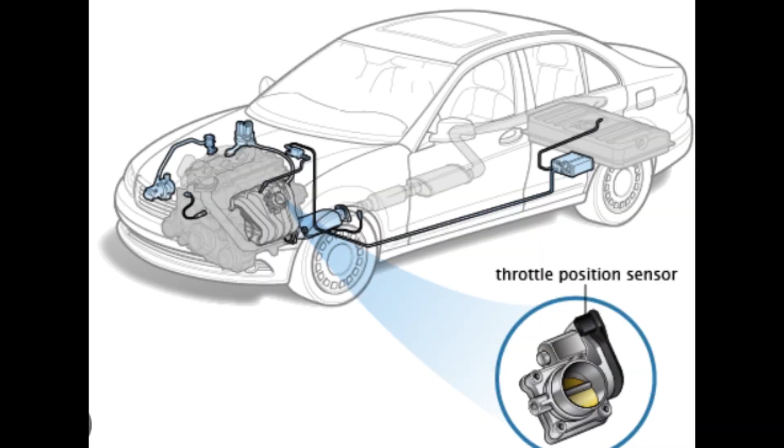What's up, it's Carter, and this is our Week 3 Automotive 240 video. In this video, we will talk about throttle position as well as different temperature sensors. The cars referenced in this video include a 2017 Buick Encore, 1999 Acura TL, and a 2006 Toyota Corolla. We will be demonstrating different tools and readings between similar sensors on these vehicles.

My name is Aiden, and today we'll be going over throttle position sensors, engine coolant temperature sensors, and how to use the scan tool, picoscope data, and showing you how to backprobe the connector to get that data.

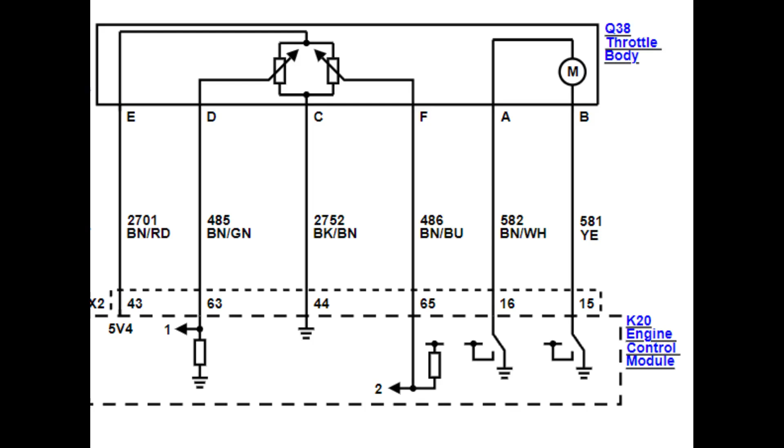Here I have a diagram of the throttle body for this Buick, and our two signal wires are going to be 485 and 486. Those are our two signal wires. And going in here, we can see us backprobing that connector, and we have it grounded straight to the negative terminal of the battery. And with this, we can see our testing with the two lines. One's going to be a positive, one's going to be a negative, following each other to make sure they both work properly.

This is our live scope data we got from the 2017 Buick Encore throttle position sensor. The results from this are similar to what the scan tool had shown. The scope data more accurately depicts how voltage is changing between these two inputs.

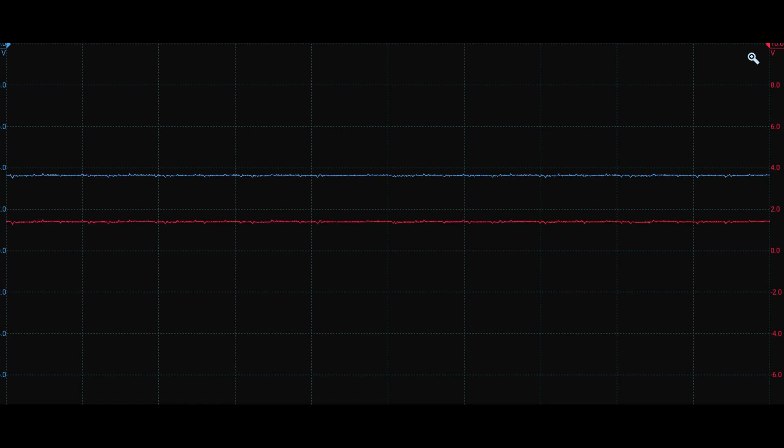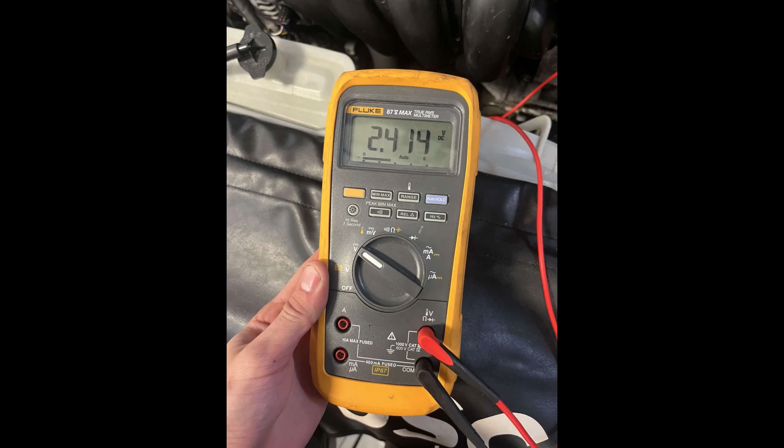Here we are demonstrating how you can use a multimeter to get a reading from the throttle position sensor. As you can see from this photo, the ECM is commanding 2.4 volts while the car is at idle.

We also use the live scope to measure the ECT. As you can see in the video, we set our range to measure from 0.5 volts up to 5 volts. The scope data shows how the voltage of the ECT signal wire stays around 1 volt with short spikes while the car is at idle.

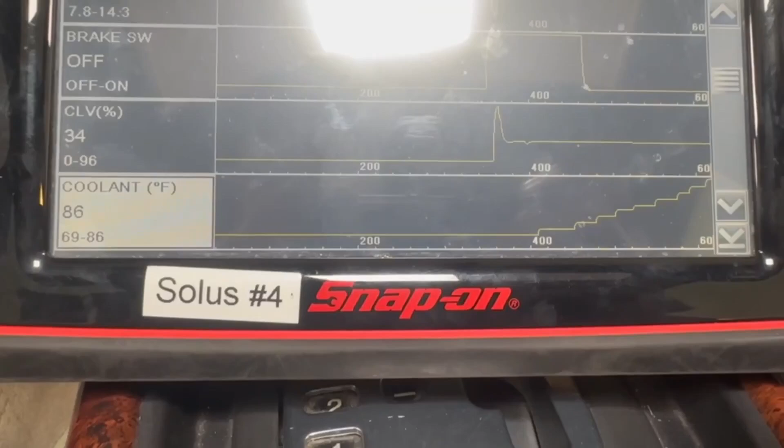So here I have the scan tool connected to the OBD2 port on this Toyota, and we're just showing you the coolant temperature sensor and how it slowly rises and makes a nice graph in the scan tool, showing you that the temperature is going up and roughly what the temperature is on the system.

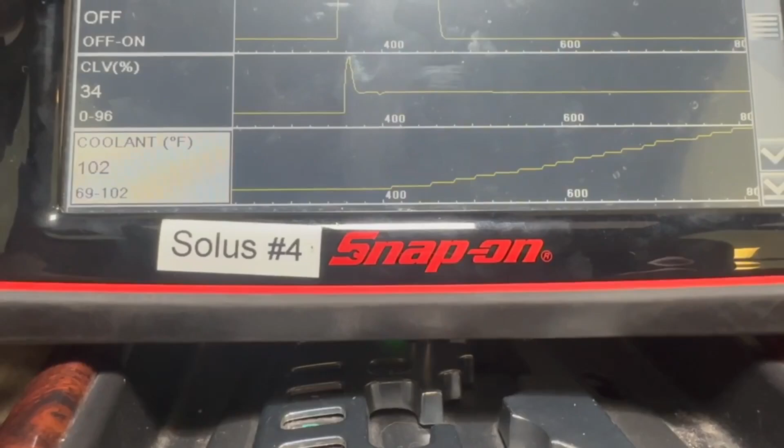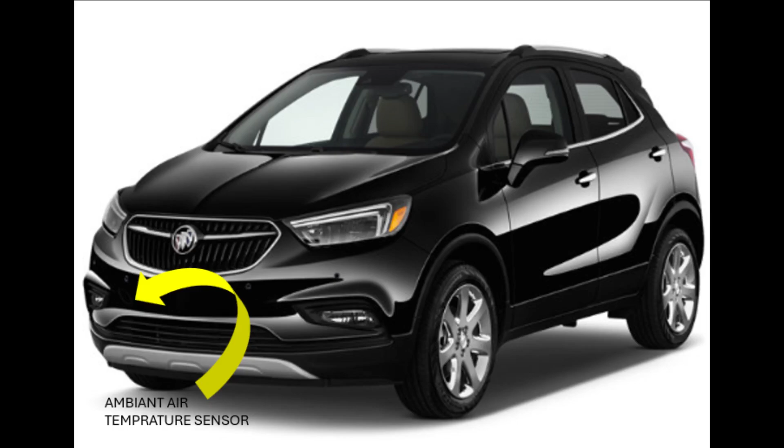Here we are using an infrared thermometer to get a reading near the ambient air temp sensor. As you can see, the sensor should be around 70 degrees Fahrenheit. We can then compare this to scope data and see how the vehicle makes changes for this value.

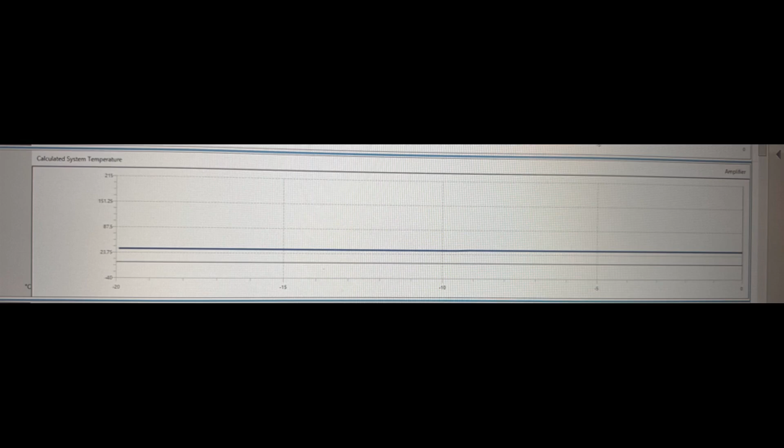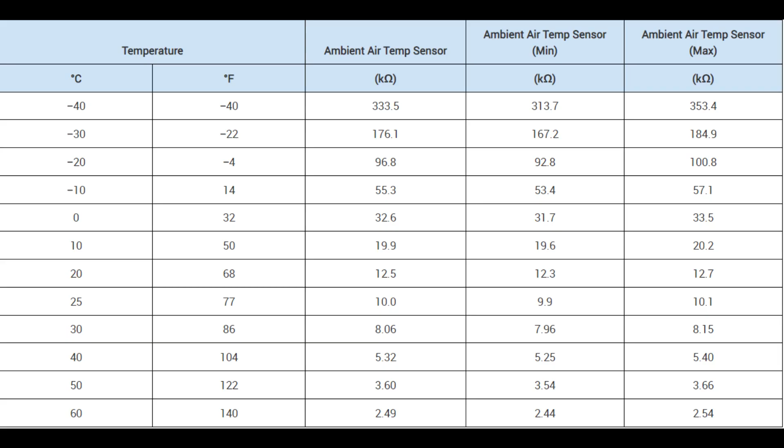As you can see from our scope data, the vehicle is calculating that it is about 24 degrees Celsius or around 75 degrees Fahrenheit. This shows how the vehicle is able to calculate average temperature during a trip and control certain engine conditions based on that value. Here you can see how things like engine temperature can control certain conditions such as spark advance.

We hope this video does a good job of depicting how sensors on different cars can be used by manufacturers in the same way. Our goal of this was to show how you can use different devices while diagnosing to locate an issue. We also wanted to define how readings from different devices may differ in results and how you can use those results to locate and correct a problem.